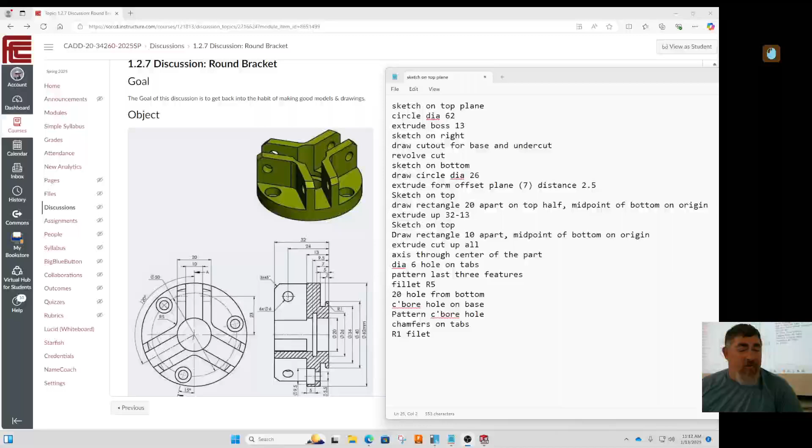Start recording. All right. So here we have this part that you guys have been working on. And so here's my steps. There's lots of different ways this could be done. This is the way that I chose to. And as I was writing it out, I switched things around a little bit. And that's why I like to write it first sometimes, just to get that practice of knowing my steps ahead of time.

Because as I went through here, I was like, oh, I need to do this pattern here, or oh, I should do this feature before I do this pattern. Because at first I had this one here for patterning before I put the holes in the tabs. Like, no, I should do the holes first and then pattern it, so I don't have to do two different patterns on the same basic things.

And so the way that I'm thinking about doing it is I'm just going to draw the 62 millimeter thing, extrude it from here all the way up to 13. And then I'm going to cut out this little section right here and do it with a revolve cut. Yes, there's a few different ways I could, extrude up. But remember, I like to use the numbers that I'm given. I don't want to have to do the math. So if I was extruding up, I was going to have to do math or subtracts or whatever.

And I could do that. But if I decide that, oh, I want this to be 3 and that to be 4, then I have to go back in and change those equations. What's a way I could do that and not have to change equations if I wanted to? If I wanted to be able to do stacks and be able to do subtraction without having to edit the equations every time I change a number.

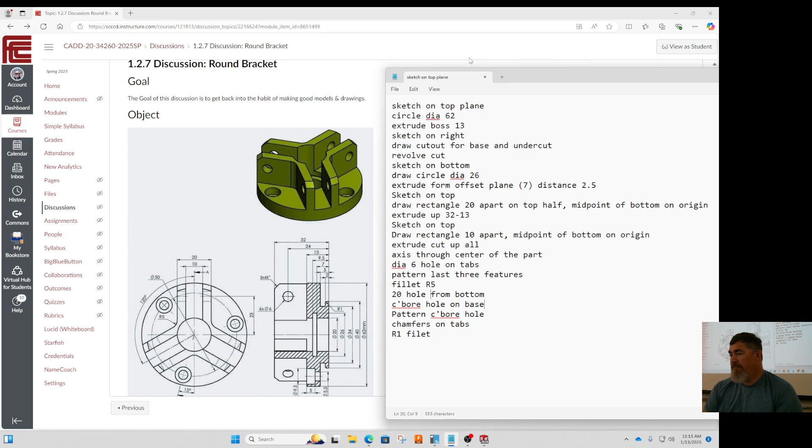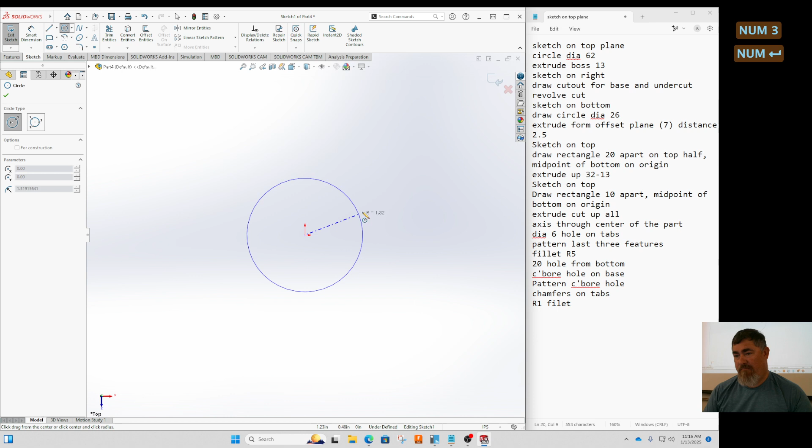So now let's do it. So I have my steps. So I'm going to extrude boss. This. Top. Circle. Remember when you're drawing, if you type a number, actually here, I can't even type, but if I just go in and type it here, does that save? Does that make it constrained? No. Type it in here.

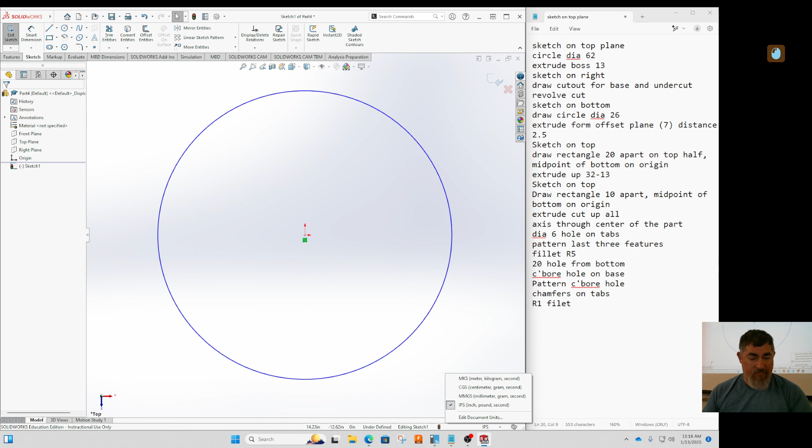Also, it's a radius, right? And I want a diameter. But if I say a number, that's the radius, but it does not constrain it. Look, see, it's still blue. Also, I need to change my units, right? My units are inches. There you go.

My units are inches. Change them to millimeters. And it kicked me out of the sketch. So make sure you try and do that before you start. So just right click, and the edit sketch is right there. Now I'll do my dimension, and that's going to be my 62. Okay.

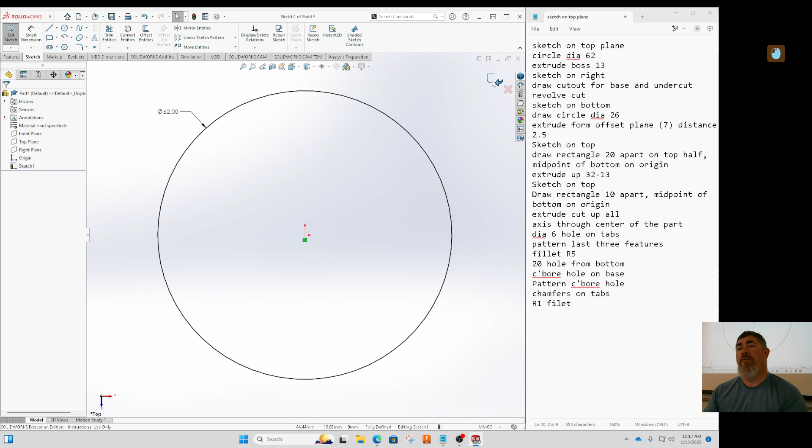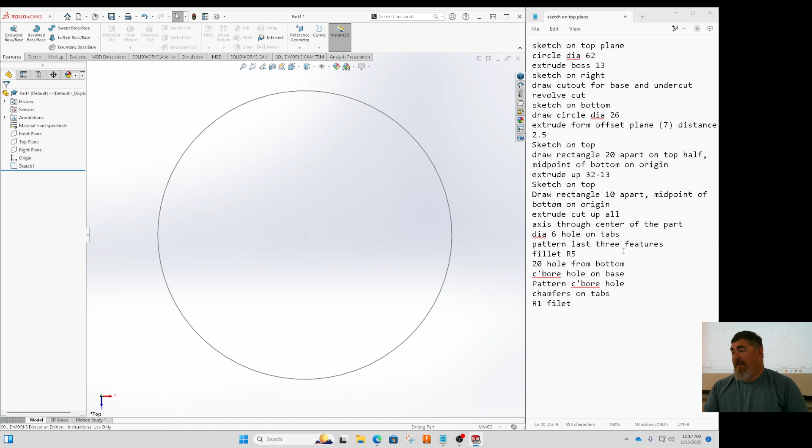Oh. I put the wrong screen. There you go. Remember, if you turn off one of the monitors, then it'll show it all on the other monitor. And so since I had gotten out of the command, I have to tell it to extrude, and it's going to be 13.

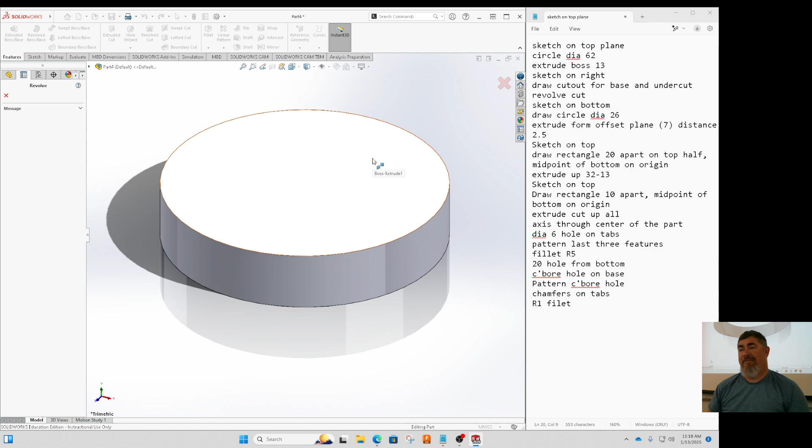Okay. Now I'm going to do a revolve cut. So remember, we have a set of commands for adding material and a whole other set of the same exact commands for cutting material. You pick revolve base, it's not going to make a cut. So pick the right one. And I want to draw on that plane going up and down the middle. Where is it? Yeah, remember the little arrow right here? Got to click there. And now I can pick that plane.

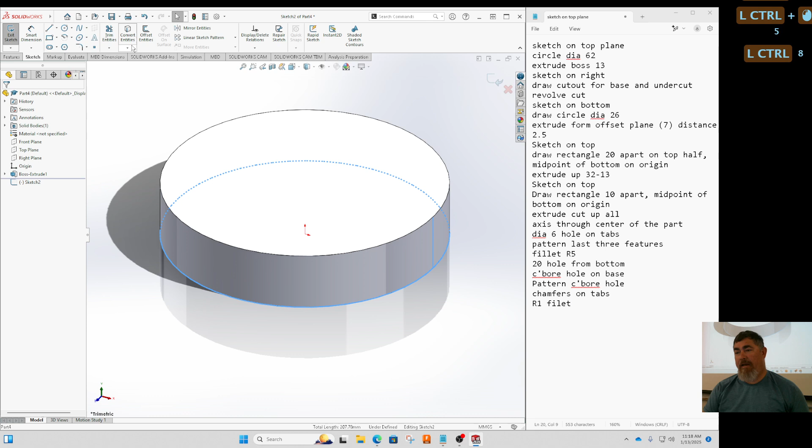And then I want to be able to snap to this bottom edge, right? So a couple of different ways. Maybe I want to grab this edge right here, this silhouette edge. I could either grab that one, or grab both, and tell it to convert entities. And now that projects those things onto my current sketch plane. Now I can draw in what I need to be.

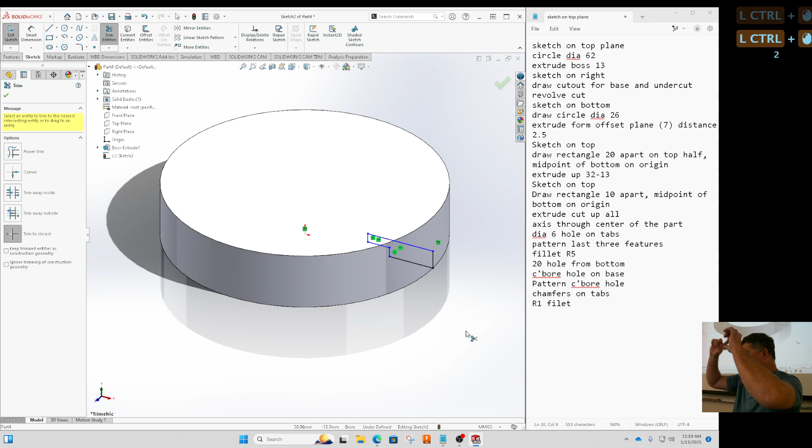So it's going to go from here, up a little bit, in a little bit, up a little bit, and back to there. And I want to trim off anything extra. So I'm going to go trim to closest, and take away that and that. I want only my profile. I don't want any extra stuff. Center lines don't count. But let's say I do want a center line there because I do want to give it a diameter dimension. I want to do a line there.

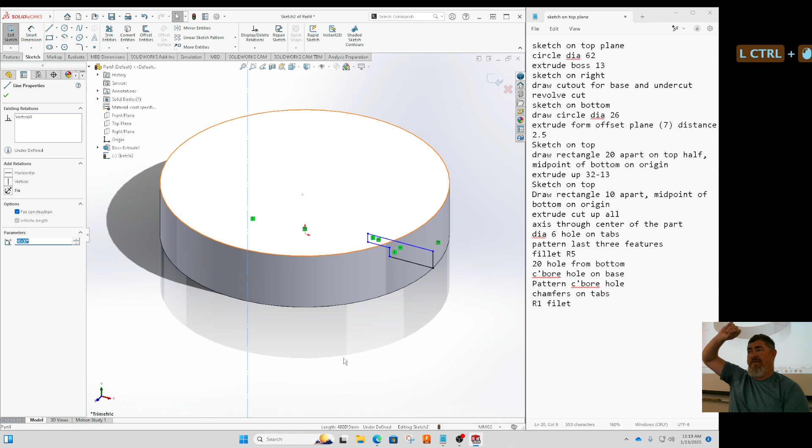And I want to tell it for construction and infinite length so I don't have to do it. But as soon as I did infinite length, look at what happened. It's not on the origin anymore. Why is that? Why do you think? Yeah, because there's no endpoint. Remember, I had the endpoint of the line on the origin, and then I made it infinite length, and that start point went away. Now it doesn't know. So how can I put that back on the origin? Yeah, so just pick on that line, hold control, pick my origin, and add them coincident. Now it's there. Okay. Make sure that that's locked down onto it.

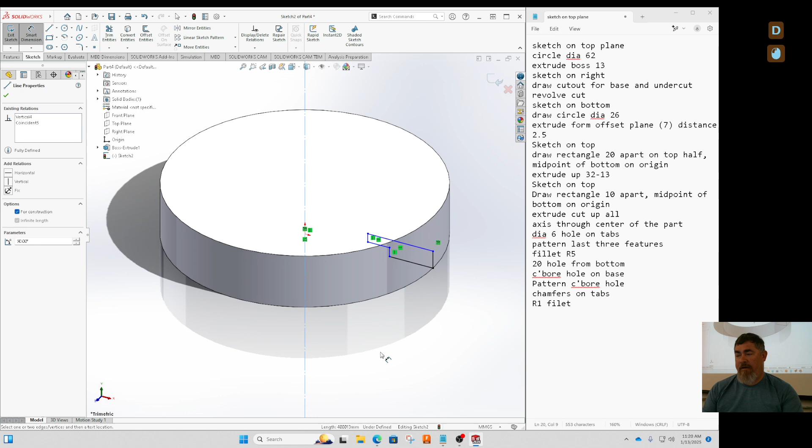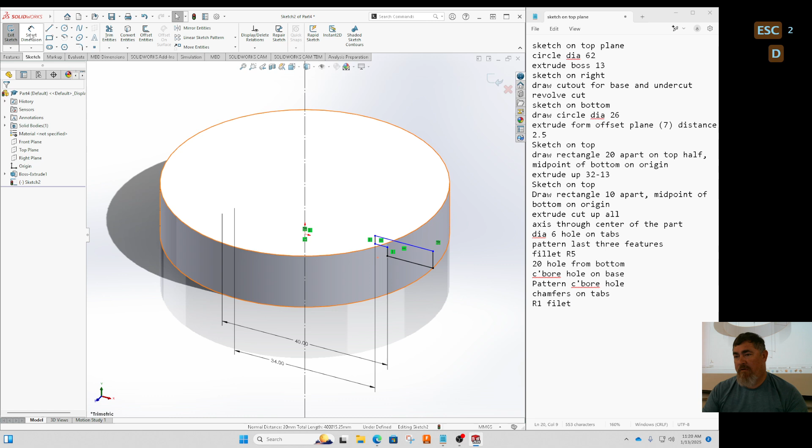And now I can start dimensioning my things. So dimension from that line to there. If I'm on this side, I just get the radius, slide it over, I get the diameter. So that is my 40. From there to there. That is my 34. Then this line right here is my 2. And this line right here is my 5. Right? That's what I want to cut out.

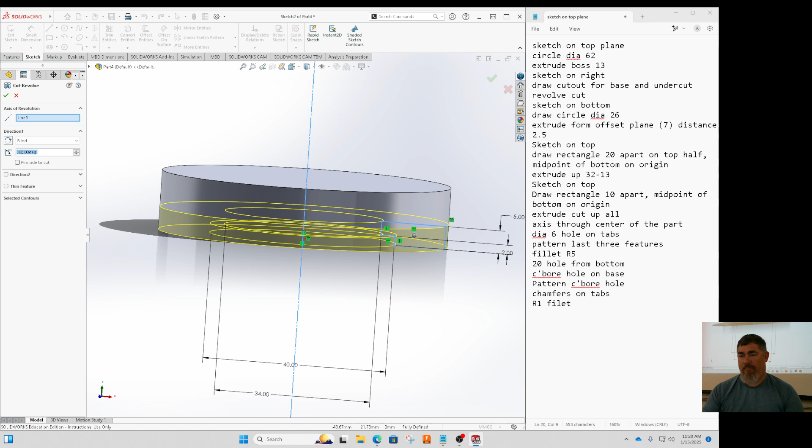Finish the sketch. And because it had a center line, it's going to revolve around that center line. If not, I could pick the edge of the part. So now I get that. Any questions? All right, so I am to there. Now I'm just gonna do an extrude cut the bottom here.

And why don't I do a hole for this? For making that groove. Why don't I use the hole command? It's round, it's cutting into it. Can I make a hole with a flat bottom? Yeah, I can. Yeah, but it's not going like from the surface. It's not a hole, right? It's round, but it's not really a hole. So that's why I'm okay doing extrude.

Doing the slot right here. It doesn't start on a surface. So in order to use the hole command, I would have to make a plane where it is and then start there, go only 2, and then change the settings to be a flat bottom. In that case, it's easier just to do an extrude.

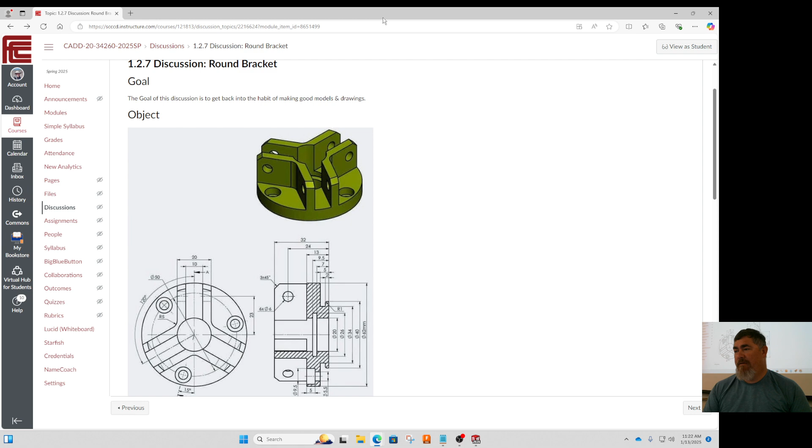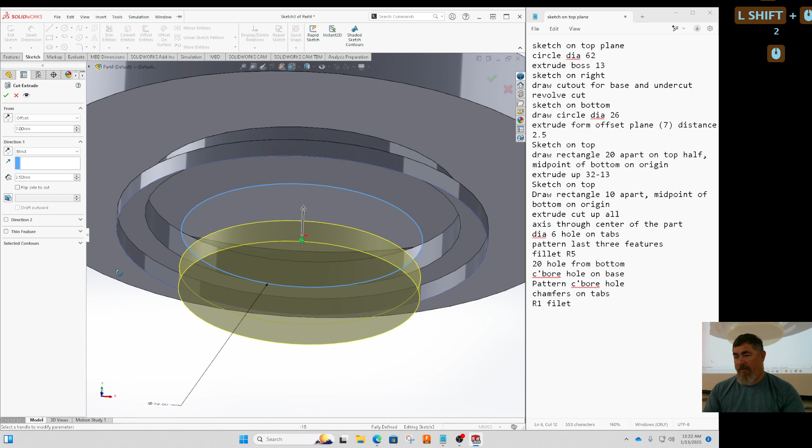Now I'm going to make it my 26, and then I'm gonna go offset 7, and then my distance is gonna be the 2.5. And right there. Oh, I want to go that way. And also, remember on the distance, we have a flip also. So I want to start 7 up and then go an extra 2.5. If I did this, I'm just going 7 to the bottom and then 2.5 back down.

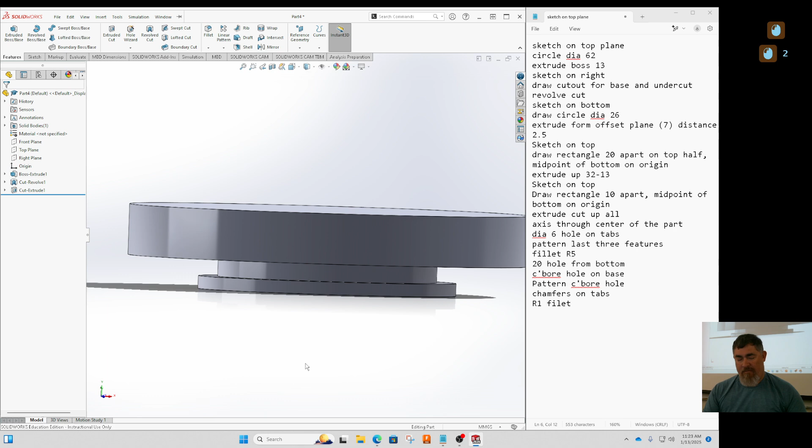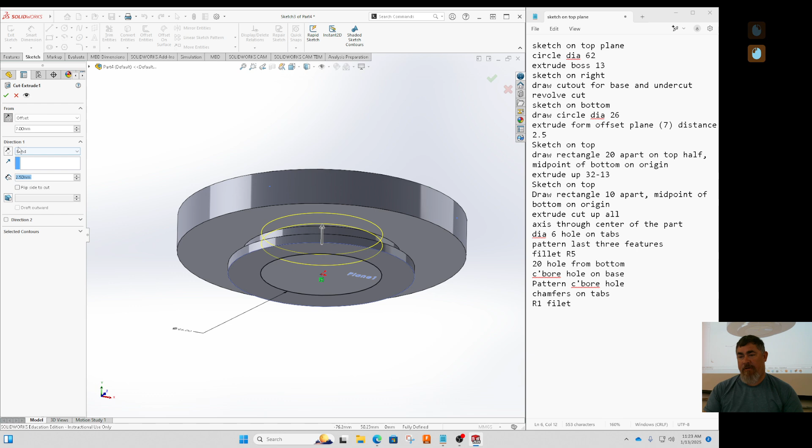And I could also create a plane there at the 9.5 and have it go from the 7 to the 9.5. Right? So if I went here, made plane at 9.5, and then I edit that feature, I tell it to go from the offset of 7 to surface, pick that plane. Now it's going to be there. Now that plane is being measured from the bottom. Does that make sense? So lots of different ways depending on how I'm wanting to control it.

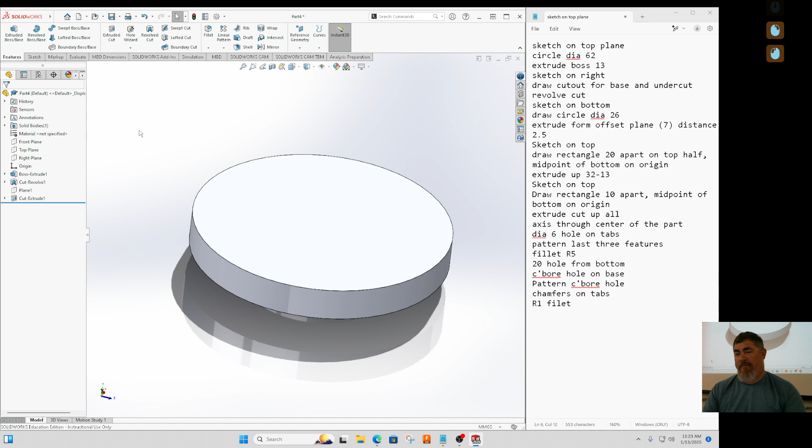And I'm just going to turn the eyeball off on that. All right, so now I'm making these pieces up here. I said a rectangle, that works. I want to make sure I'm lined up with my origin. Rectangle from there to there. Then I'm going to pick my origin, control that bottom line, midpoint. That way it snaps it there.

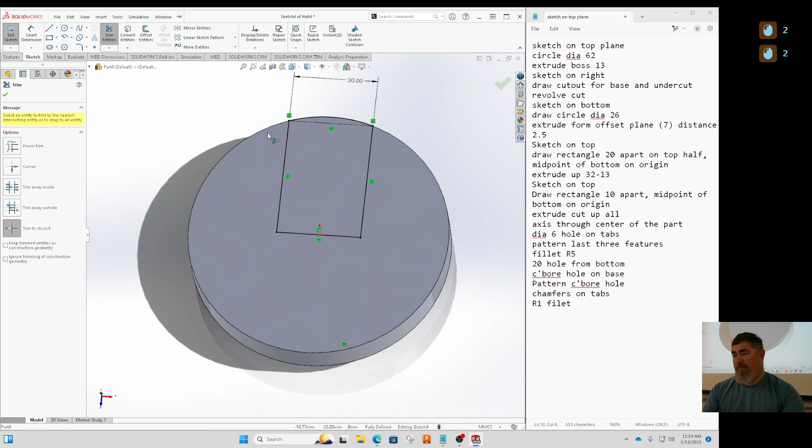I can just tell it this point here is going to be on there. Point there is going to be on there. And make that construction line, so that way it doesn't cut off my profile. I can tell that to be 20. And that. So now I have my profile in there. Say OK. So that's going to be my 32 minus 13. Okay. Questions?

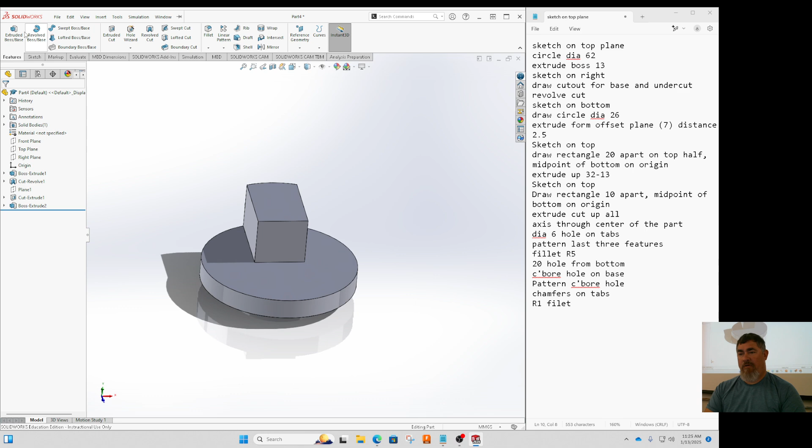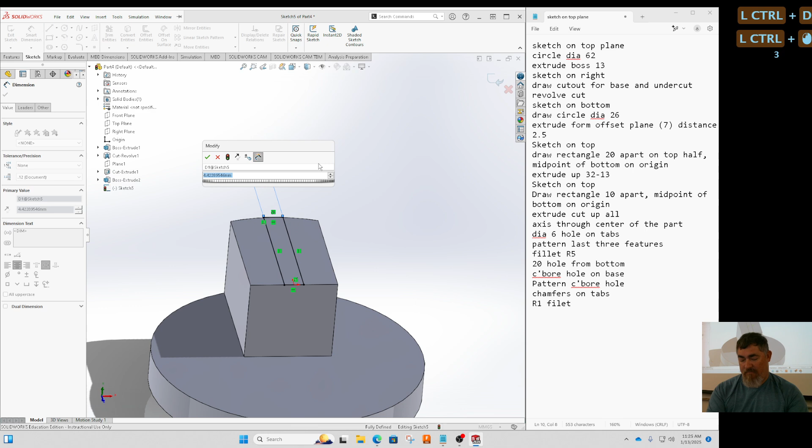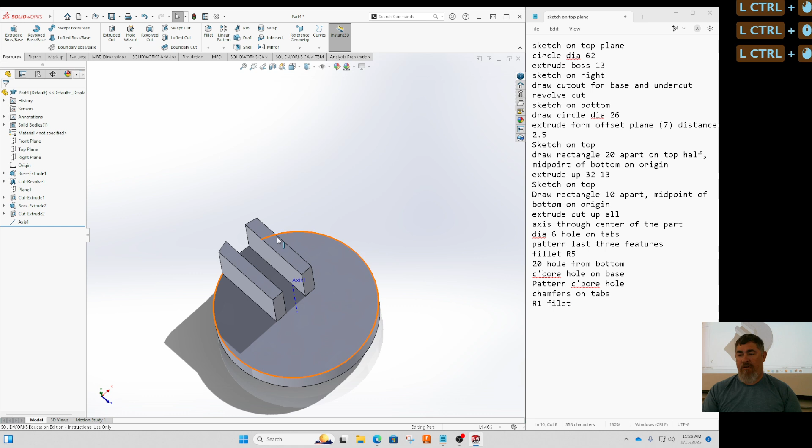Extrude cut. There. Rectangle. Make those two tangent. Finish. And then just go up to surface to there. That way, in case I change the height, it'll always go back to there. Questions? And just to be safe, I'm going to add an axis here in the center of it. But the edge of my part is lined up with that, so actually I don't really need that, right? So I'm going to undo that.

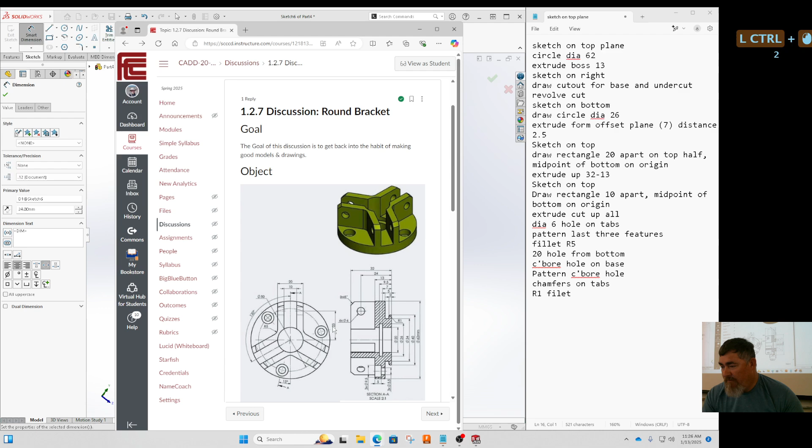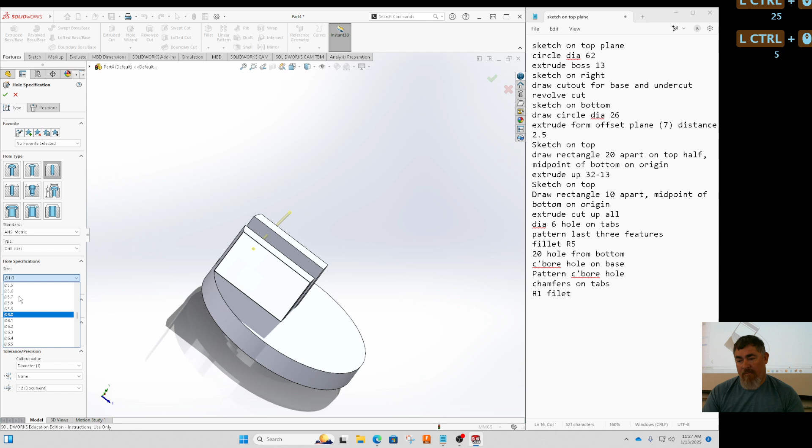So now hole positions on that face over here somewhere. And it is 24 from the bottom. So from the edge there, 24. And then it's 23 from the center out. So from that edge that's lined up with the center, there, 23. Okay, go back to type. And the size is going to be metric, regular hole, drill size, and through hole.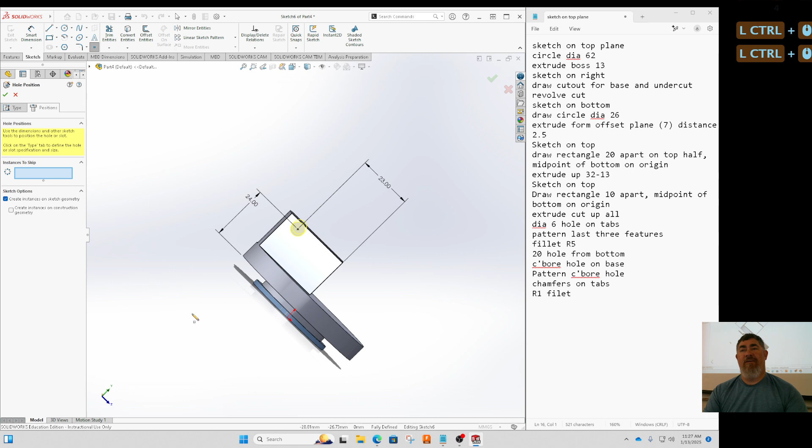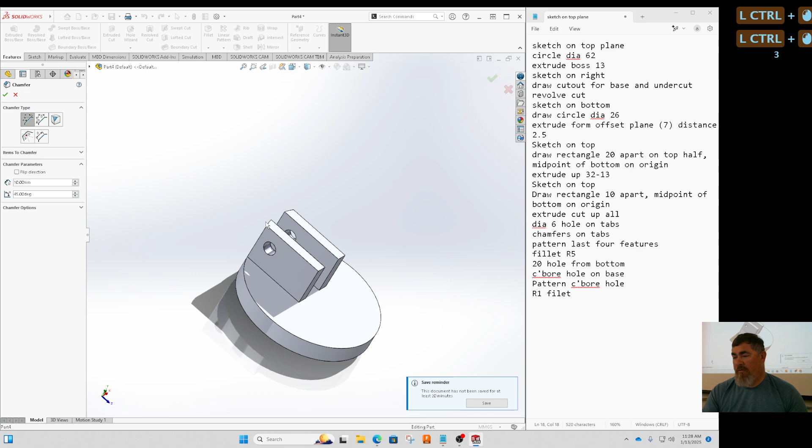Oh. I went from that edge. It's supposed to be from the bottom edge, right? Yeah. The bottom edge there. 24. So make sure you check your dimensions. There we go. And now I can do my pattern. Actually, I'm going to move this there. And that's my last 4 features. So I'm going to do my pattern, my chamfers. Also, before I do that, I should probably save, right? Just in case.

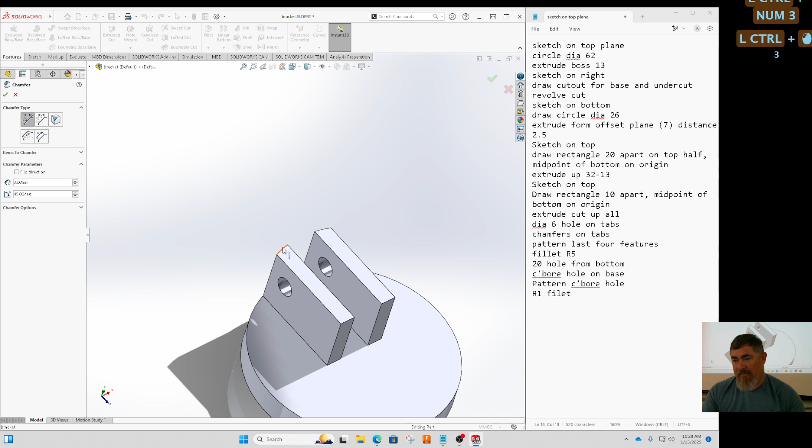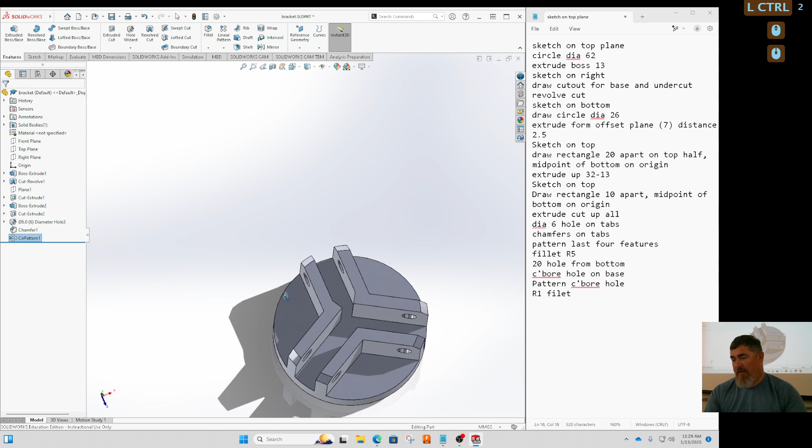Chamfer. I'm going to make it 3. Items to chamfer. There. There. Okay. And now I can do my circular pattern of that, and that around there. And that looks very pretty. Got stuff going on inside there. Do I care about that? No, why? I'm gonna cut it out with a hole anyways, right? So I don't need to try and make that look pretty at this point. I could spend extra time and make those all even, but it doesn't matter. It's going away.

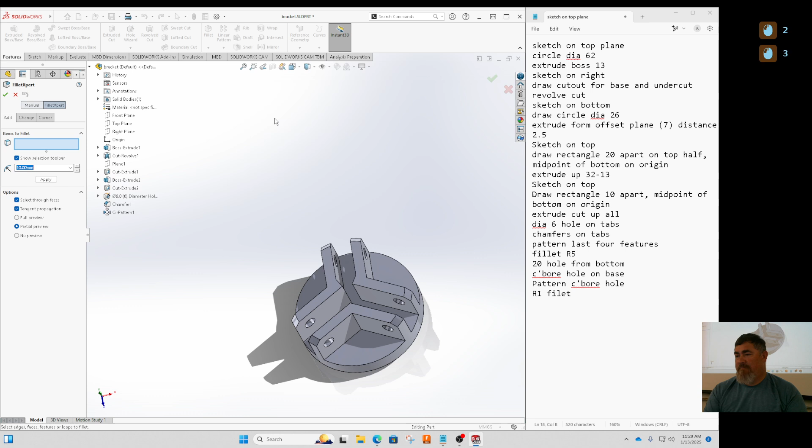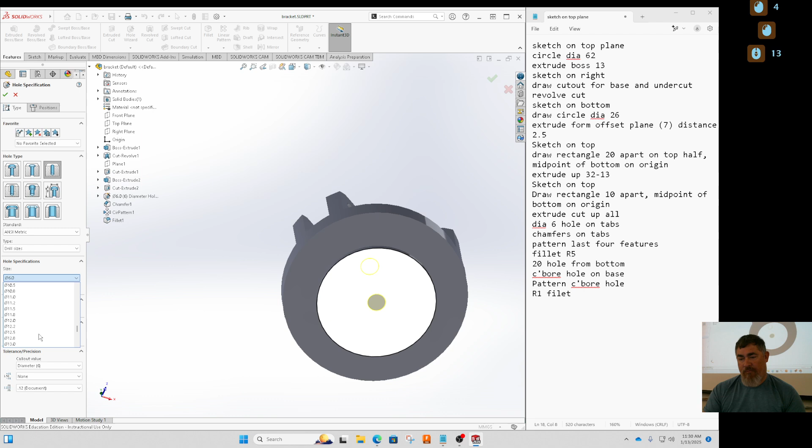Pattern those. I'm gonna add those fillets now. Or you can select through the part. You don't have to rotate around. You know where the fillet's gonna be. Find that edge and pick the edge. Add in. Now my hole. Position on that face at the center. And it's gonna be a regular hole, and it's gonna be 20. Cool. Okay. Ta-da. Go. Our space bar gives you this. Both this box and this one. This one here lets you see the cube.

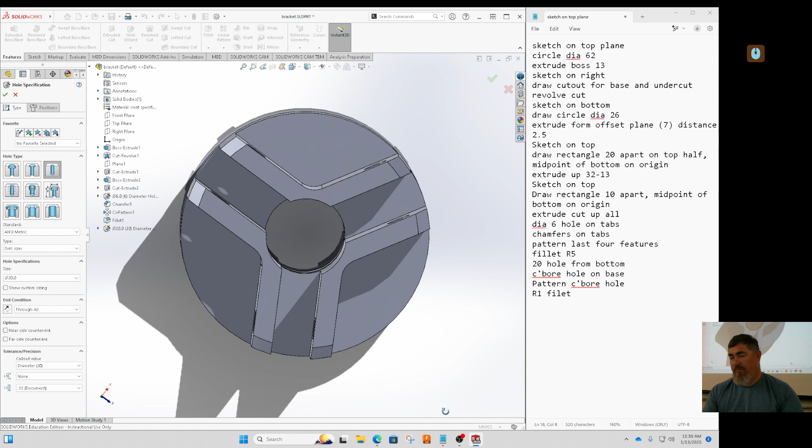And now it's just that counterbore hole. So, hole. And that way. Take it right there. It is on a 50. So it's on a 50 diameter circle from the inside. So I'm just going to dimension from the origin to there. Do an aligned dimension, just pull it out. So not horizontal, just do the aligned one and tell it to be 25.

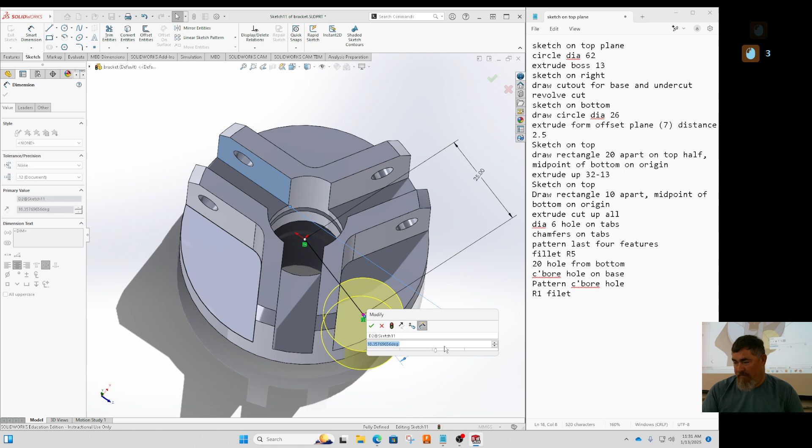And I should probably also draw a line, just so that way, skip that one, right? Otherwise, any endpoint of a line is going to become a hole. And now I can tell it that I want that angle to be 15 degrees. So from that edge, that line, 15. So now it's fully constrained. I can see that down here, fully defined. Say OK. Go back to my type. Counterbore hole.

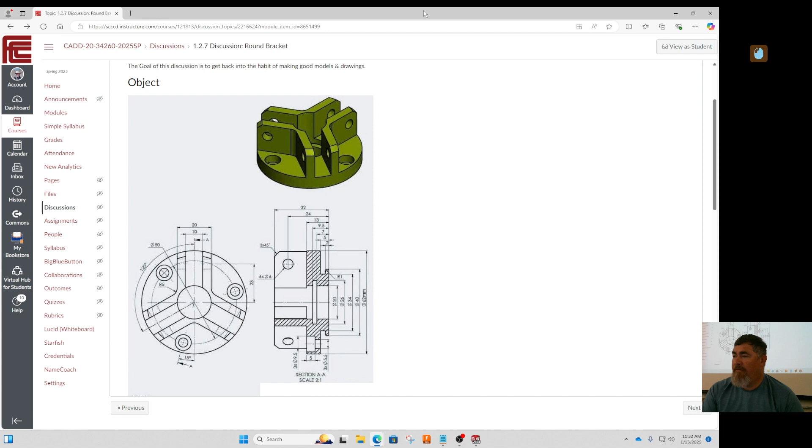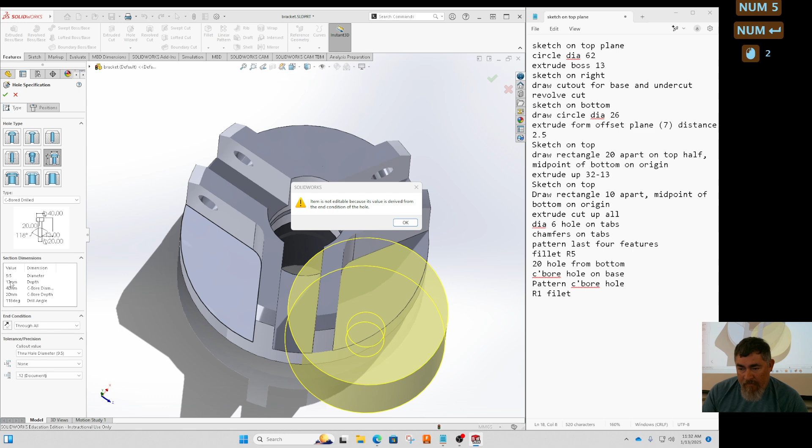And actually, since I know the sizes of this thing, it's a 9.5 counterbore, 5 deep, with a hole that's 5.5. That doesn't look like it's a standard size hole. So I'm just going to use the legacy hole, and tell it to be a counterbore drilled hole, and then tell it that the diameter is going to be 9.5. The 5.5. Counterbore diameter is the 9.5. Counterbore depth is the 5. Through all. There it is.

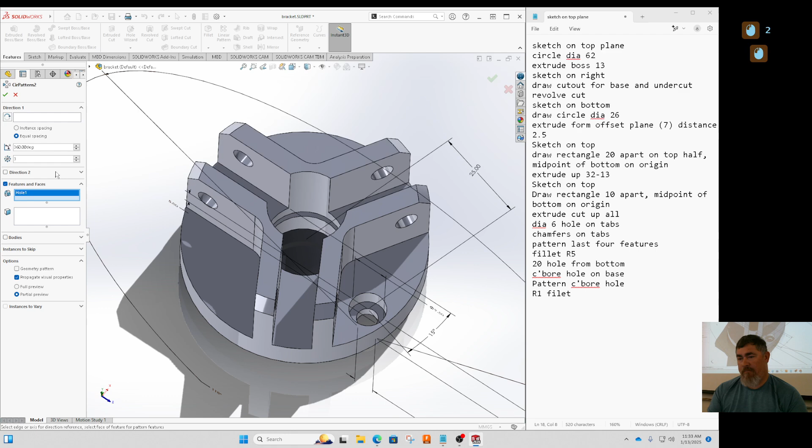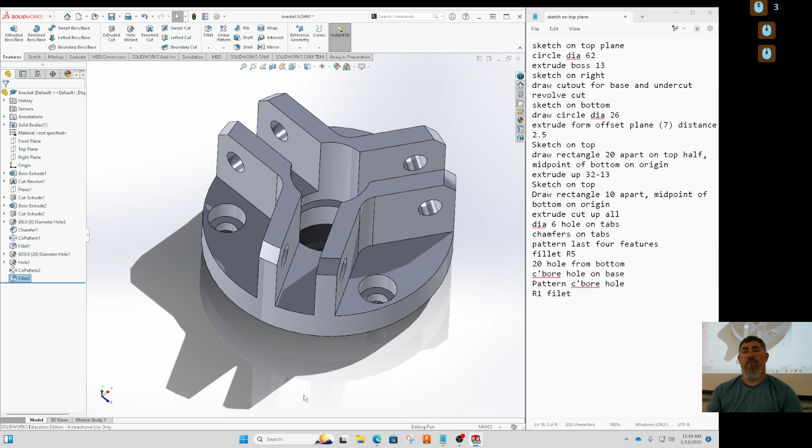Okay. And now I can pattern that. Again, pattern that hole around the outside of the part. And then now I can do that last little fillet. And there it is. Okay. So